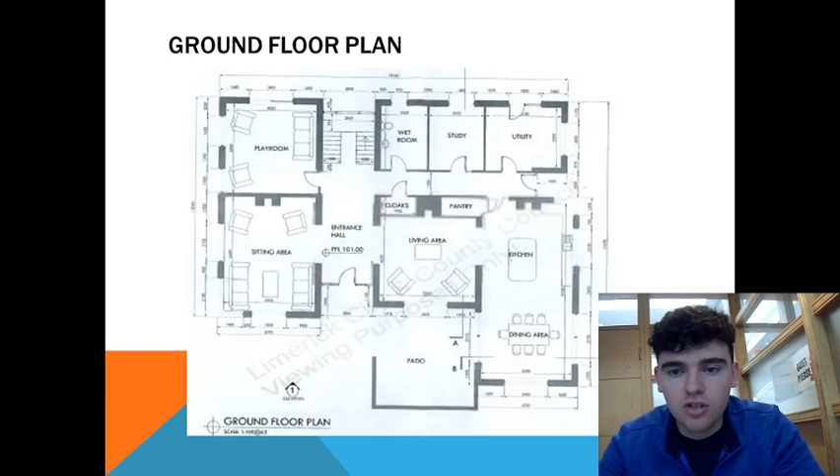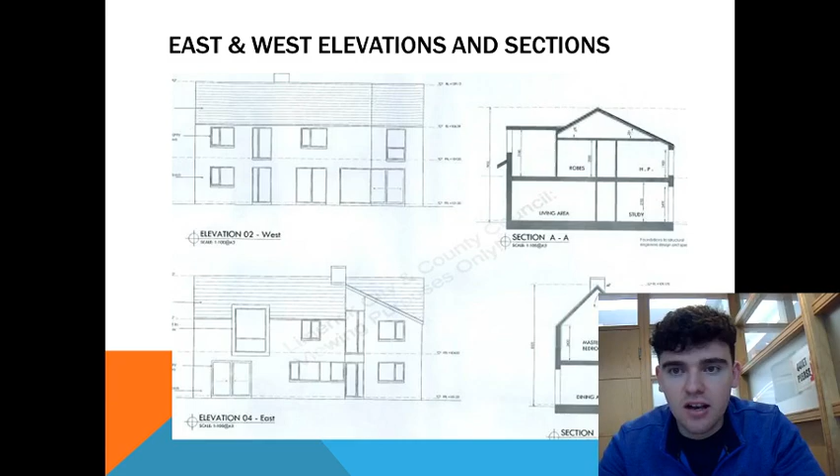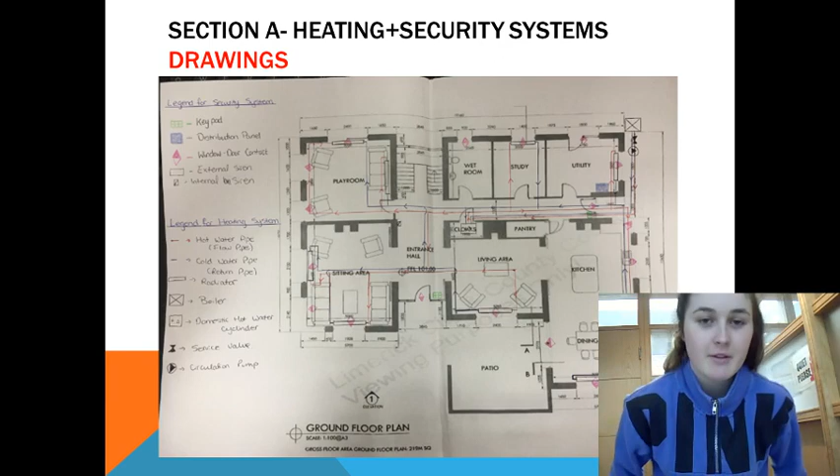Hi, my name is Maeve Coffey and I'm doing Section A, Heating and Security Systems. From the drawing you can see that I have two legends, one for the security system and one for the heating system. On the ground floor plan, the security system consists of two keypads, one at the front door and one at the back door.

This enables the owner of the house to turn on and off the alarm when entering and leaving the building. The distribution panel is in the utility. This is where the alarm is wired throughout the house. There are 16 window and door contacts throughout the house.

This is how the security system basically works: if there are any breakages in through the windows or doors, the alarm will be set off. There is an external siren outside to let neighbours know, and an internal siren to let the occupants of the house know. The legend for the heating system consists of the hot water pipe, which is the flow pipe.

And the cold water pipe, this is the return pipe. These are the hot and cold pipes that flow to and from the radiators in each of the rooms. There's a radiator in each of the rooms, as can be seen from the drawing. There's a boiler which is located outside the house.

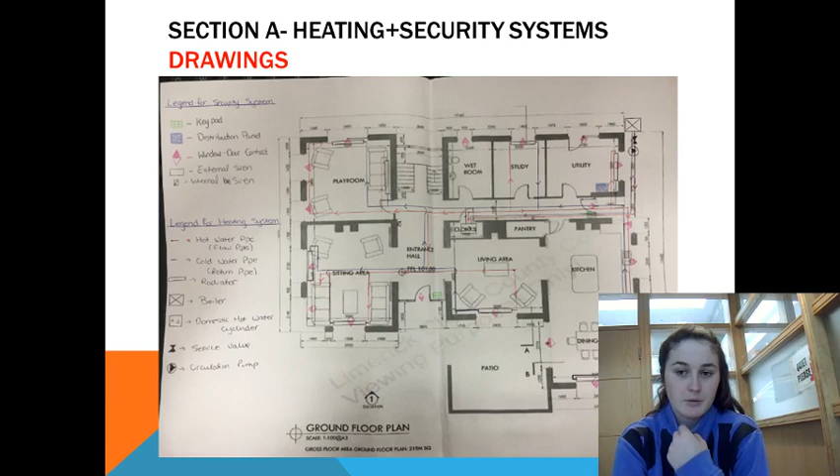The water comes in from the boiler into the radiator and into the cloakroom where the domestic hot water cylinder is situated. There's service valves outside the house for the boiler, and there's a circulation pump also. Upstairs you can see that there's radiators in each of the rooms, and the hot water system is in the hot press.

There's flow and return pipes to and from each of the radiators. The cost for the heating and security system: on the left you have a list of all the items in the security system. The security system was priced by No Entry Alarms from Nenagh, County Tipperary. The quantity of each of the items is to the right, and the cost of the items was €1,550.

The labour rate for this job, it took 3 days, and the total less VAT was €450. The total for the installation including VAT was €2,312 for the security system.

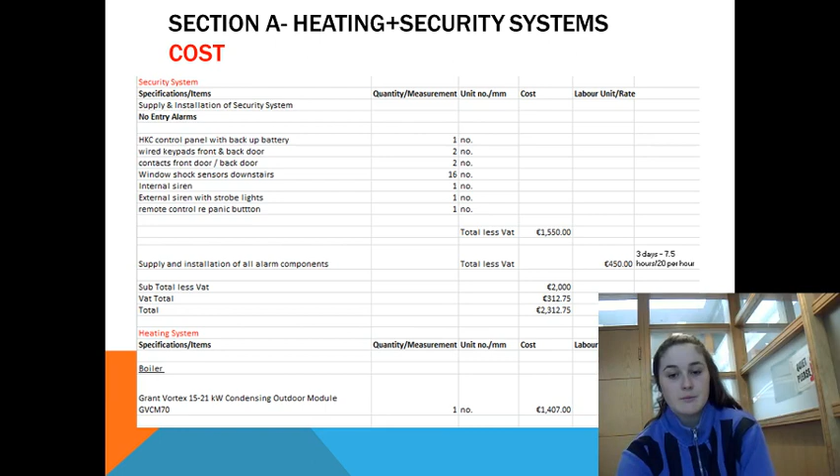For the heating system, there's a list of items including the boiler, expansion vessels, hot water pump, pipework, radiators, service valves, circulation pumps, bends in pipework and cross joints. There's also the amount of items to the right of the description.

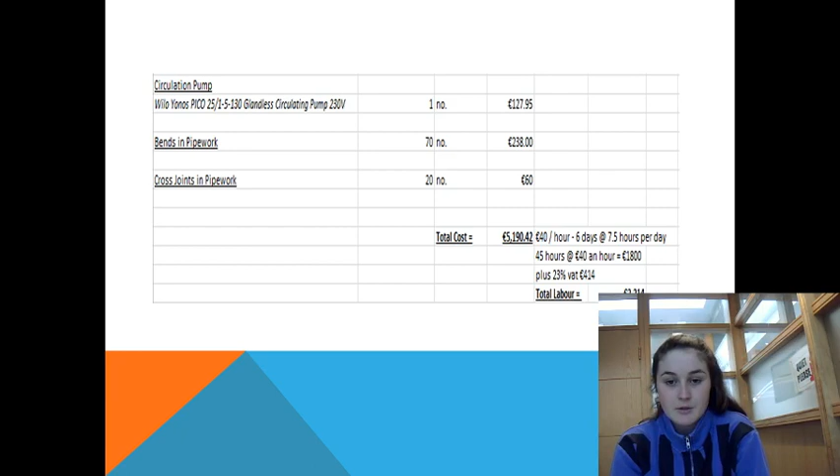The total cost for each item is €5,190.42. The total labour, it took 6 days to install the hot and cold water system, or the heating system. The total labour for this job was €2,214.

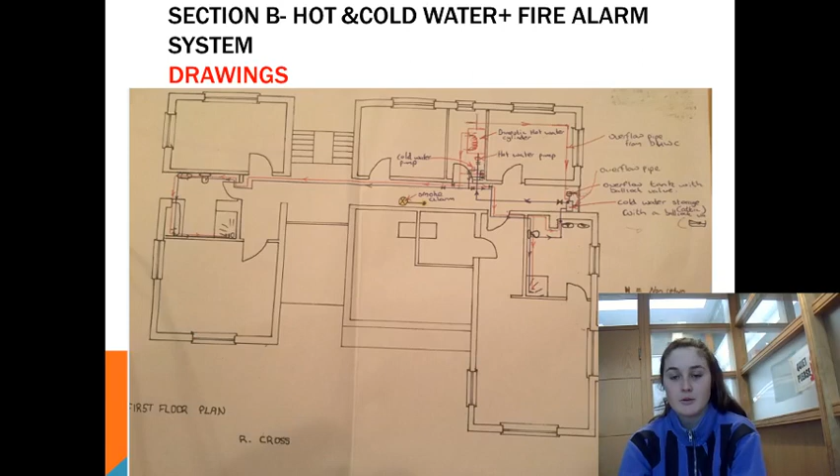So the hot and cold water system: there's a pipe coming from the mains which goes in under the road into the sink, under the sink and into the utility, which goes upstairs into the attic.

There's an overflow tank and an overflow pipe from the cold water tank just in case of overflowing. It will then go from the cold water storage tank down towards the domestic hot water cylinder.

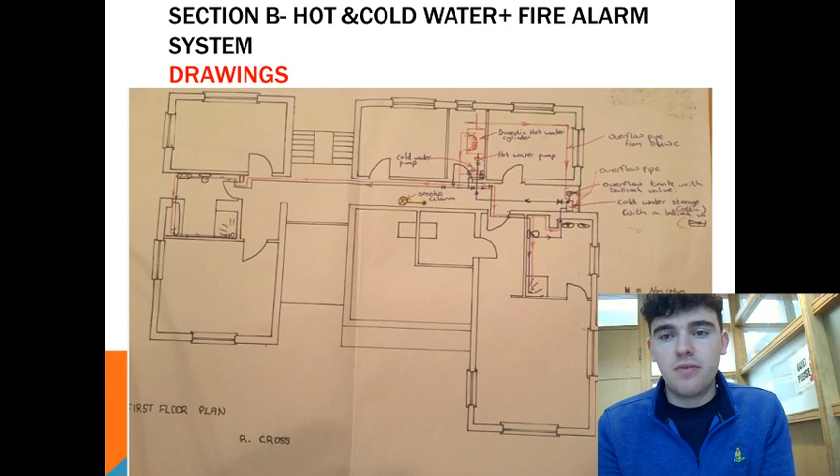Before it goes into the domestic hot water cylinder, the cold water will be pumped off and delivered out to the outlets such as the toilet, sink, bath and showers, and also to the washing machines and dishwashers.

There will be a pipe that goes to the domestic hot water cylinder, and it will be pumped into the domestic hot water cylinder, which will heat the water and be delivered to the other hot water outlets such as the sink, the bath and the shower.

There is an overflow pipe from the domestic hot water cylinder, which will also go to the overflow tank in the attic.

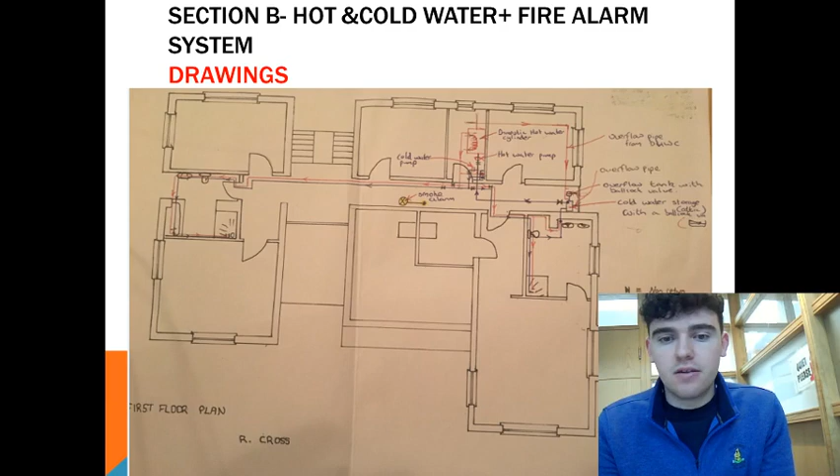The fire system, which is my second system: there is a heat sensor connected to the fuse board, located in the kitchen, and there is a smoke alarm in the downstairs hallway and in the upstairs hallway, which is also connected to the fuse board.

With regards to the cost, on the left there is a breakdown of the mains water supply, the hot water and the cold water. There is a quantity of each of these items, and the unit and the cost for each piece of equipment, and a labour unit rate done by Patrick Collins, my plumber.

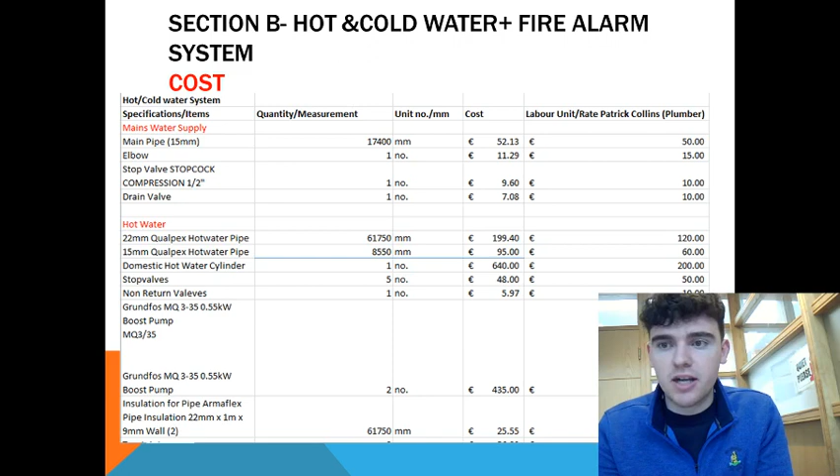The total cost of the hot and cold water system for the equipment is €2,505.45, and the labour unit rate is €1,535. The total for the fire system, for the equipment, is €103.45, and the total for the labour rate is €60.

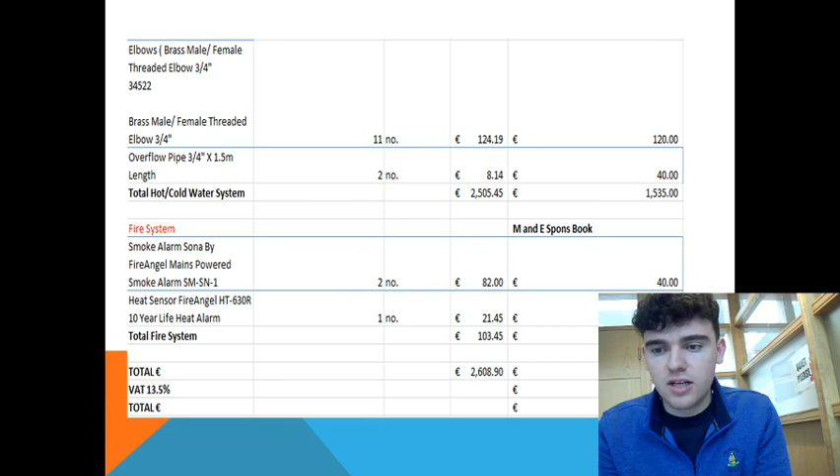The total cost for the equipment is €2,608.90, and the total for the labour rate is €1,595, and including VAT, which is 13.5%, is €215.33, which equals €1,810.33. I'll hand you now over to Megan for her system.

Hi, my name is Megan and I'm doing section C, lighting and above ground drainage.

For my lighting I included pendant lighting and LED. Pendant lights are in the majority of the rooms, and the LEDs are in the kitchens and bathrooms. In my hallway I have wall lights, and when you enter every room, to the left hand side there is a switch.

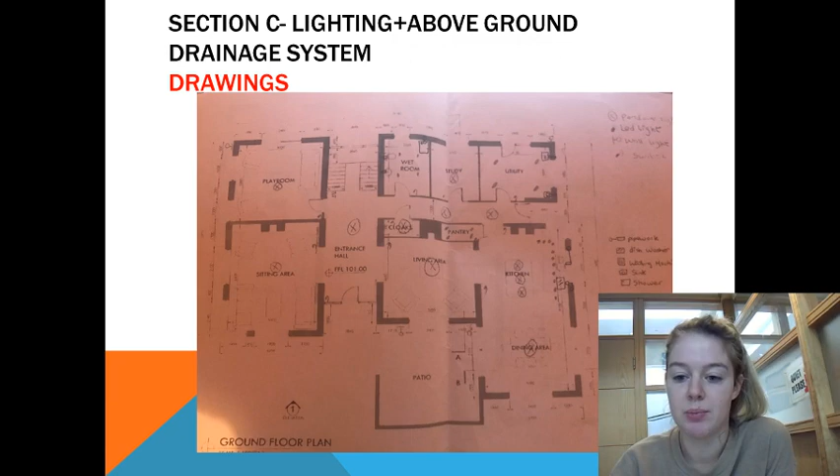For my above ground drainage, at the sinks, the toilets and the showers there's pipework including traps. This can be seen here on the side of the houses.

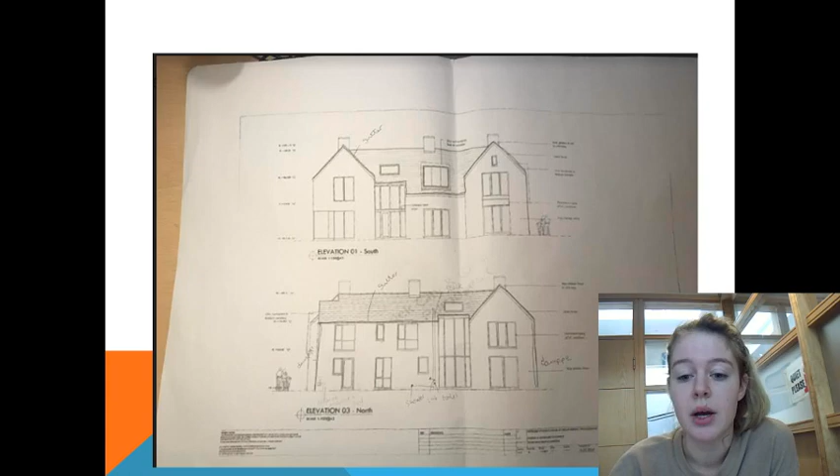There's also the down pipes, connected to the showers, washing machines, baths and sinks. On the sides of the house here you can see the down pipe. This is where all the waste will go, and above the down pipe there's a stack, so this will allow no smell to go near the house and it'll go up to the sky.

On this drawing you can see the gutters on the side of the house. The gutters take up the length of the whole house.